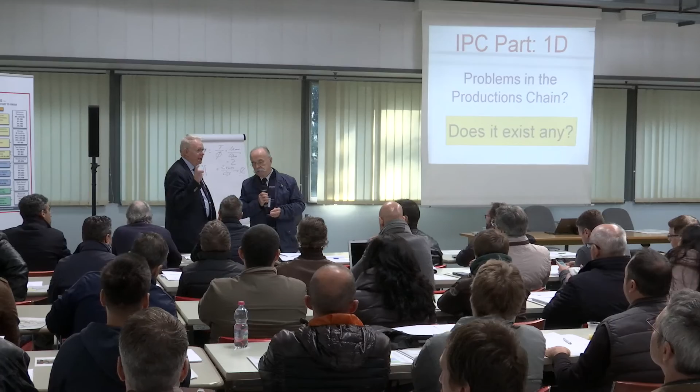That is, he is buying components from different component manufacturers. And in the data sheet, they recommend a footprint. And then comes the question: shall he follow the footprint in the data sheet, or shall he follow the footprint in the IPC standard, as an example?

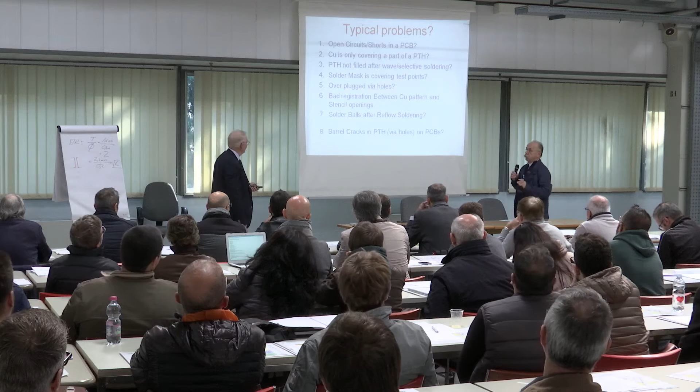Barrel cracks. I mean, this is a crack in the holes.

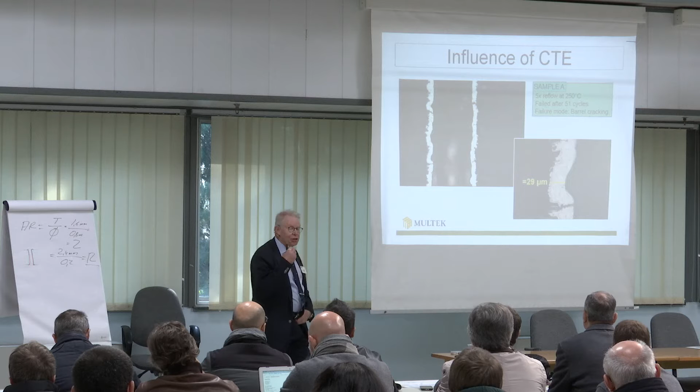Remember Volkswagen, Ferrari. And you know, here you can see it's a perfect one in the microsection. And here you can see it's because they have chosen the wrong base material.

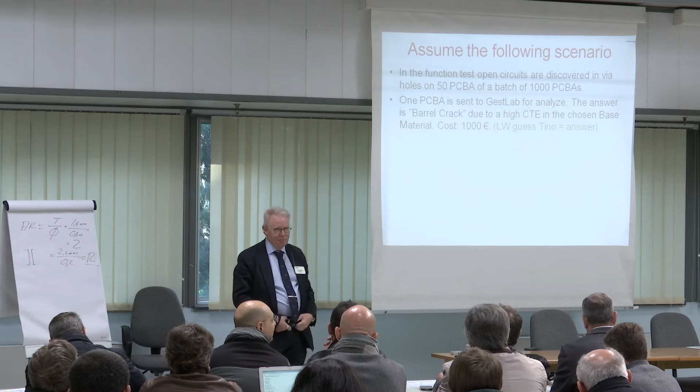So now we can make a calculation. We say that every board, including everything, costs 100 euros. So with 50, the scrap boards are 5,000 euros.

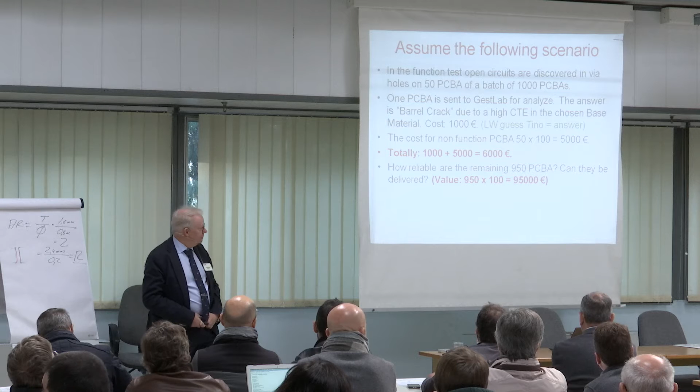Value here is 95,000 euros.

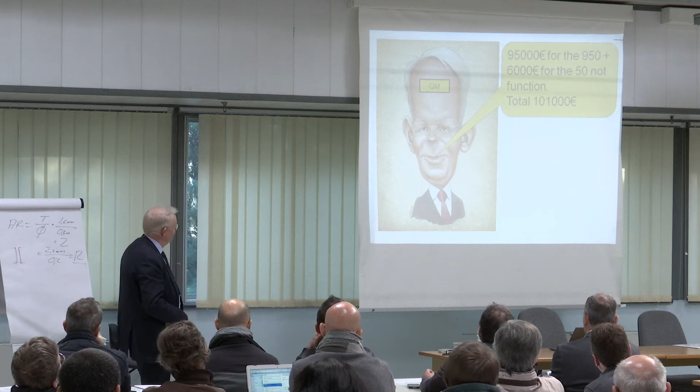And you know the boss, he says, what the... I can't say it in Italy, if it was in Sweden I would.

And now comes the question, what will you do? How many of you will say, yes, deliver the 950? How many?

Dennis, why? Yeah, but the base material is wrong for everyone. No, we have discovered the fault in 50. Maybe the other ones are not complete. Maybe. This is a risk. What happens when the boards come in the...

Oh my God, I have a connection with the mafia.

I accept you. Dennis, who agreed with Dennis? Deliver, raise your hand. A few. Who will say scrap them? Pavarotti, scrap them? Yeah, he's rich. The rest, what do you say? You don't know. Segregate, we will see. Yes, deliver. The purchasing, they don't care about the quality.

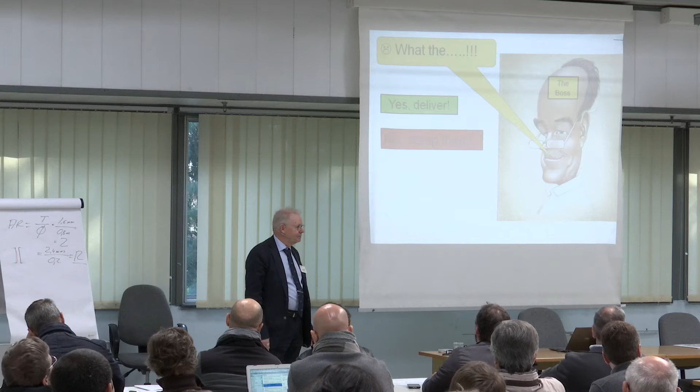Accountability, mainly that. Okay. And this means the boss can't buy a new car, because the Testarossa costs 1 million or 100,000 euros. I don't know if it costs that. Anyhow, it's lots of money.

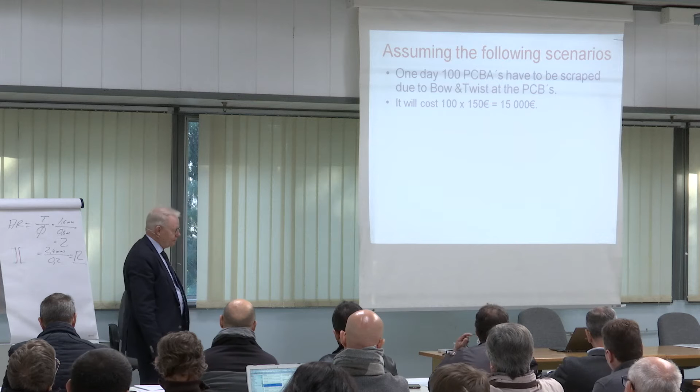It will cost you 15,000. This board is more expensive. It costs you 15,000 euros. Plus some investigation cost, so let's say 400 euros. Totally 15,400.

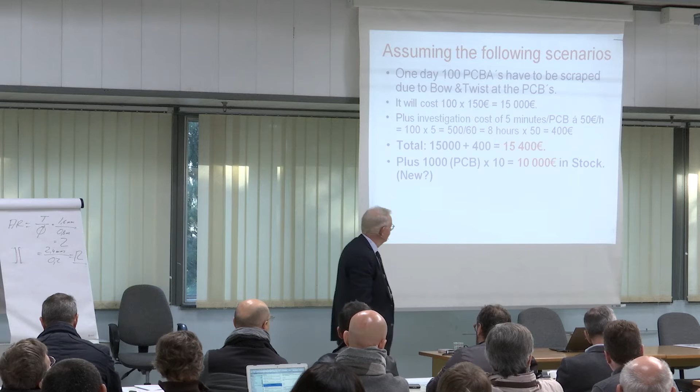So the value here is only 25,000.

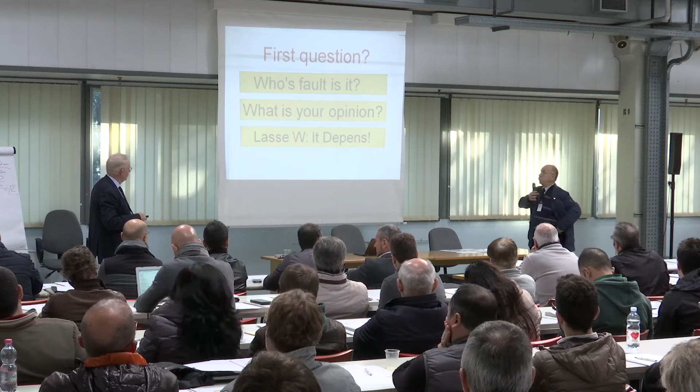So now we have a couple of alternatives here. Has the order, I mean the board project, passed DRC, design rule check?

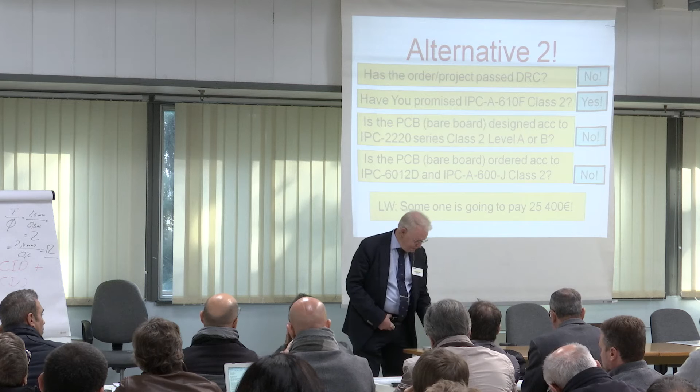99%, okay. But if you have no on this, no on the 3, you are going to pay 25,000 euros. Quindi però prima di dire di chi è la colpa, se io non ho rispettato quelle regole potrei avere la coscienza a posto.

So the conclusion is that to have good bare boards is not only a technical thing, it's a commercial thing plus a design, but it's a lot of commercial, because if you don't refer to the 6012 and 600, the bare board manufacturer is going to say we didn't see any specification.

Chiaro? Qui il capitolato di fornitura fa la differenza. Se nel capitolato di fornitura vi ho chiesto questo, quello, ok, allora posso far valere il mio risultato, ma se dico dammi i circuiti standard, dammi il vetronite, no, a questo punto, guarda, chiaro?

So he's going to pay this, yes. I'm sure there are different opinions here in the audience, and it always will be opinions. But my thing is, to have a good board, it starts with the design.

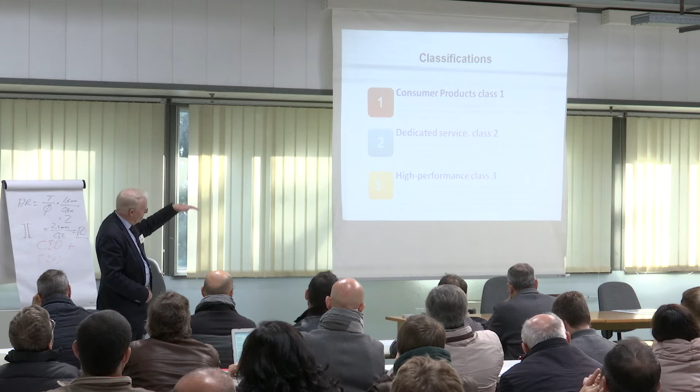In some standards, in two standards, one series and one standard, we have also level A, B and C, that is the design standard plus the footprint standard.

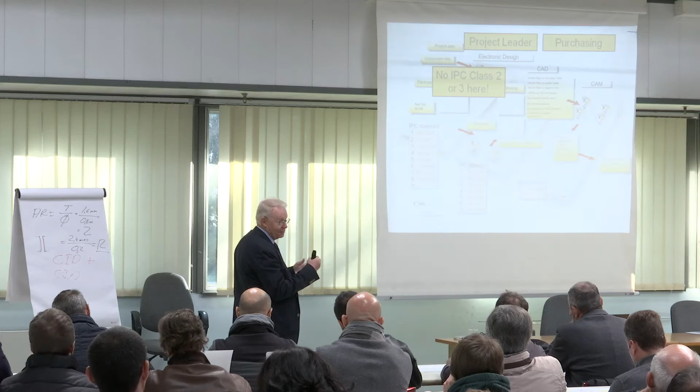And only this. You know, to be able to produce a Class 2 or a Class 3 board, the design, I mean the CAD, must be Class 2 or 3.

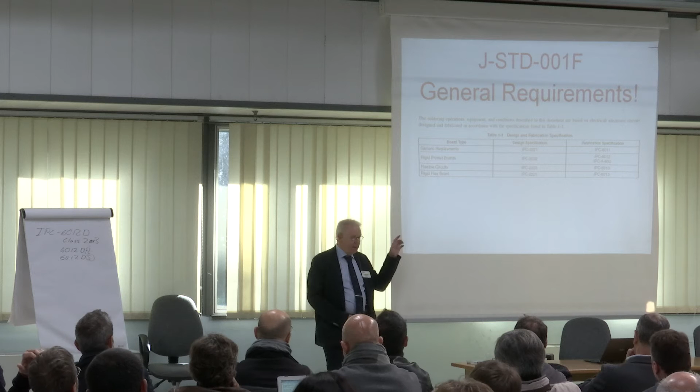And it's really... at first you have the general requirements. It goes from the start, the design - it differs depending which board you have - but then you come to the fabrication. This is PCB fabrication, so here you see the reference back in the chain.

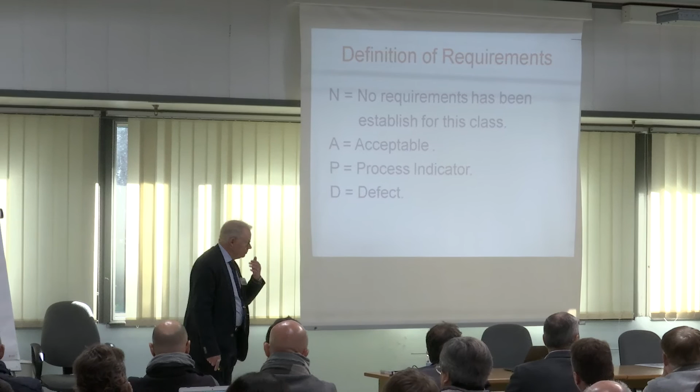And here I just take a few examples: materials and processes used - you know the material we use, there's the bare board, the paste and all this stuff. To assemble or manufacture this board, the components shall be selected such that their use in combination produce products acceptable to this standard. If you don't do that, it's a defect across all standard classes.

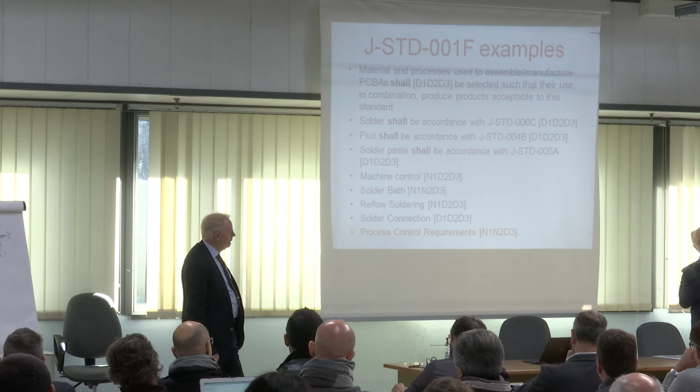You see, manufacturers of class 3 products are required to have a documented process control system. You need to have the system in class 2, but you don't have to write it down.

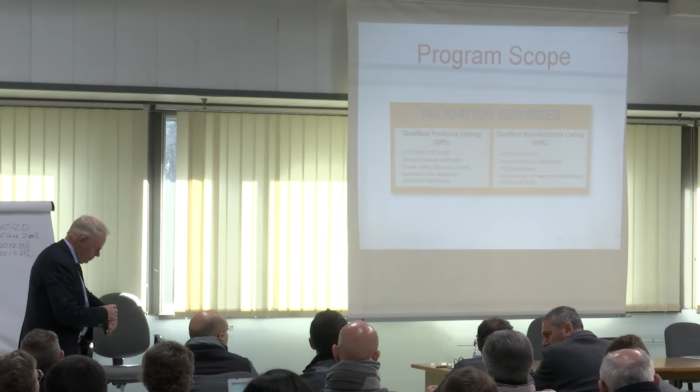So now we're coming to the next step, design.

Now you take the first one here.

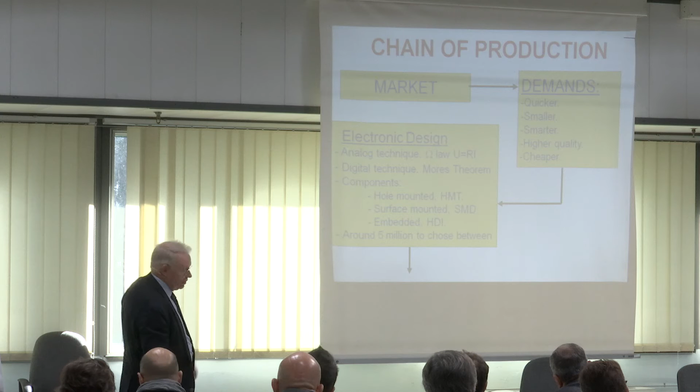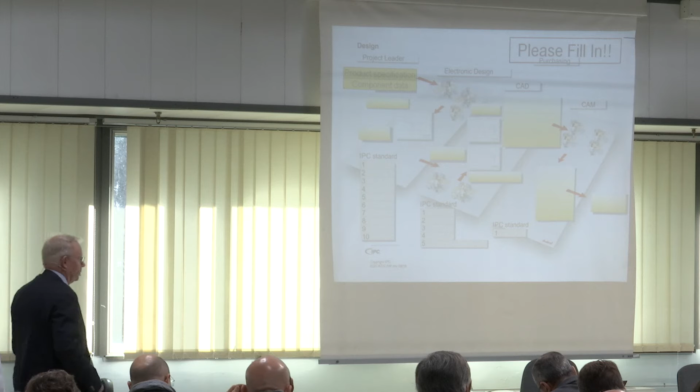And here comes the electronic design departments. They create, you know, the electronic schematics.

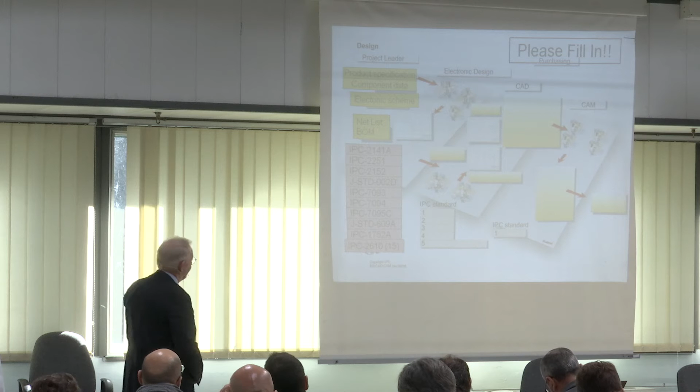And it's an interesting thing here that the first two are for when you have high speed and high frequency components, and also impedance control and such things.

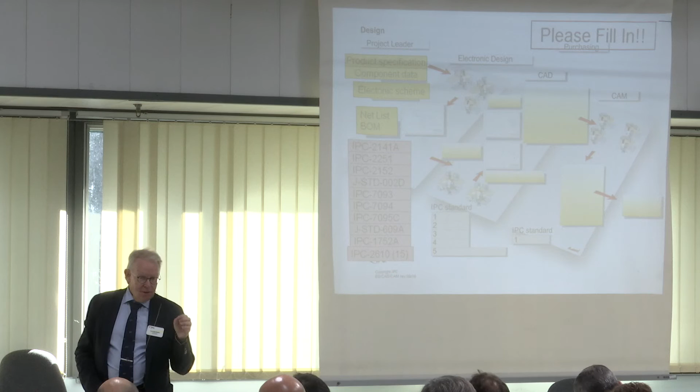And why is this important? Because if you want to have a good solder joint, you must understand that the surface finish you have on your component must match the surface finish you have on the board.

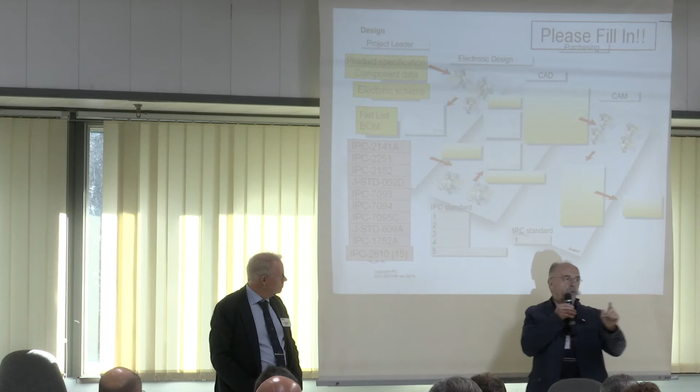This is for the material declaration, so you know that you're not violating any laws in different areas of the world, RoHS and other laws.

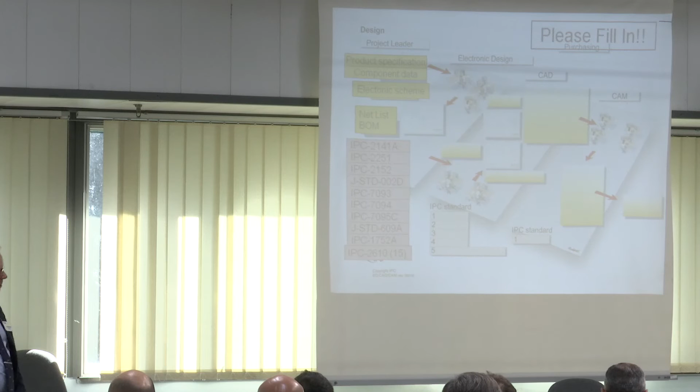So here is the base, and here you see the standard, just an example, how it looks like. Material declaration, which is a software which you can apply. You have different levels, A, B, C, and D, classification.

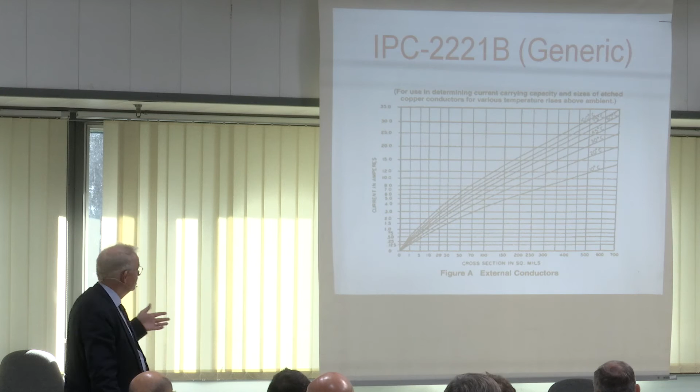For ENIG. And then you have the design guides for high-speed controlled impedance, high-speed electronics, the number of amps.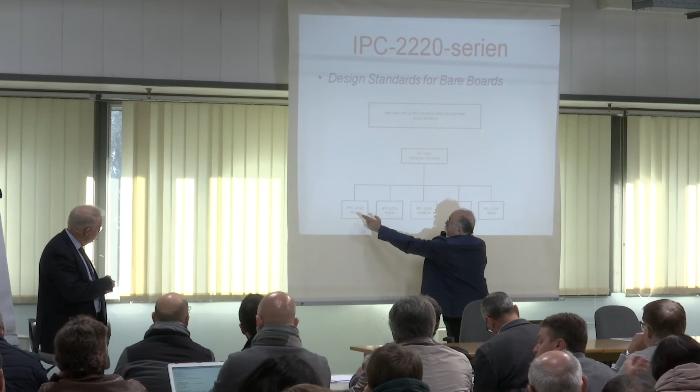Integration. Microvia. So here we have also the classes 1, 2, 3.

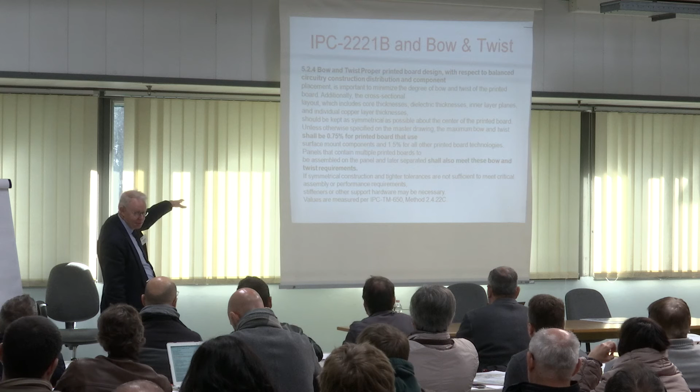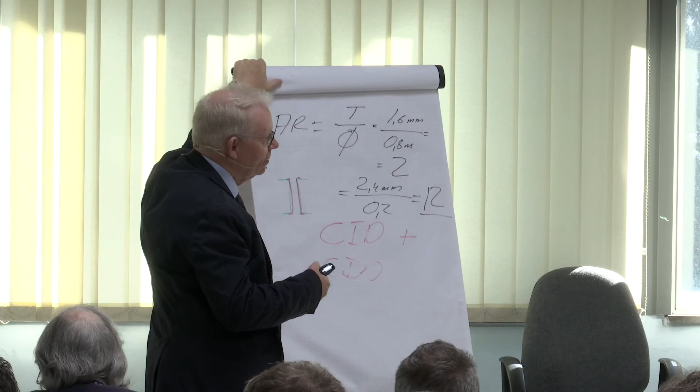So if you go back to my calculation here, if you have a 1.6 board, then the smallest hole can be 0.35 like that to get the 5 here.

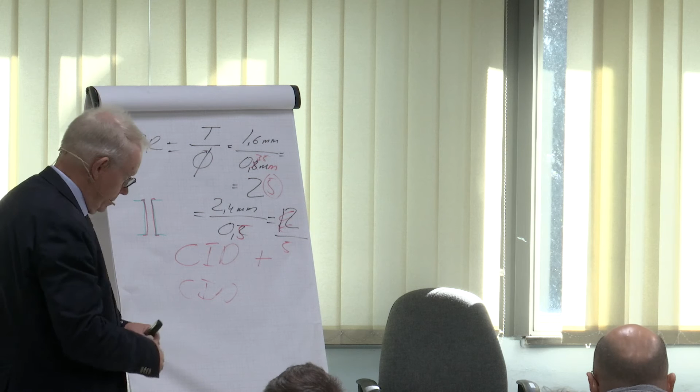And the reason for this is one, this is what it looks like in the CAD system on the screen. It's always in center, the hole.

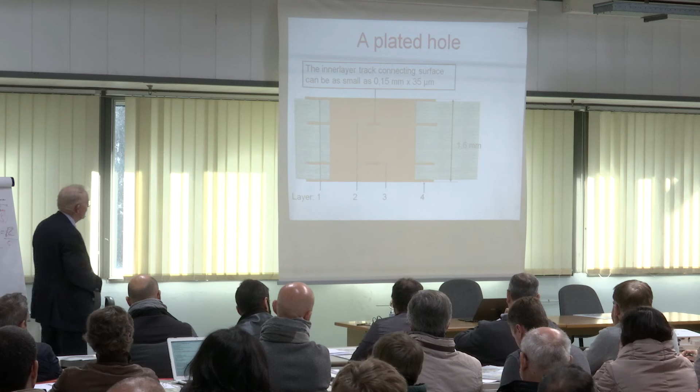Here is a picture of a microsection of a hole.

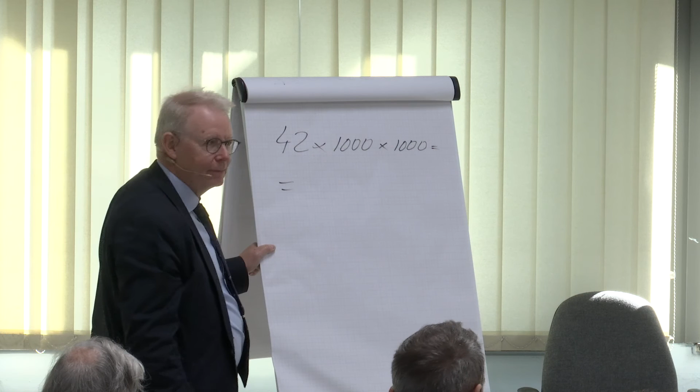What is this? Who is good in mathematics? 1000 boards times 1000 holes, 42 times 10 to the 6 possible problems.

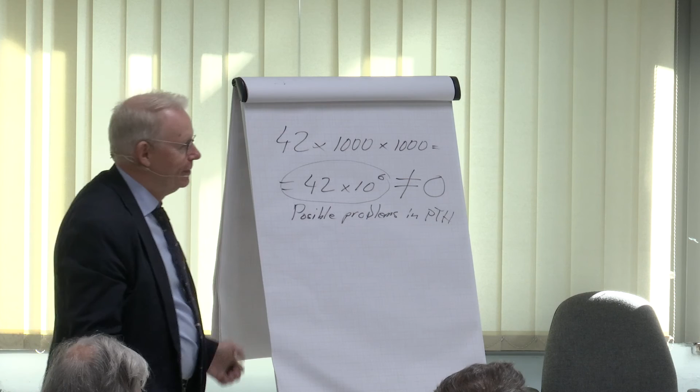If I were responsible to buy boards, I would have nightmares every night.

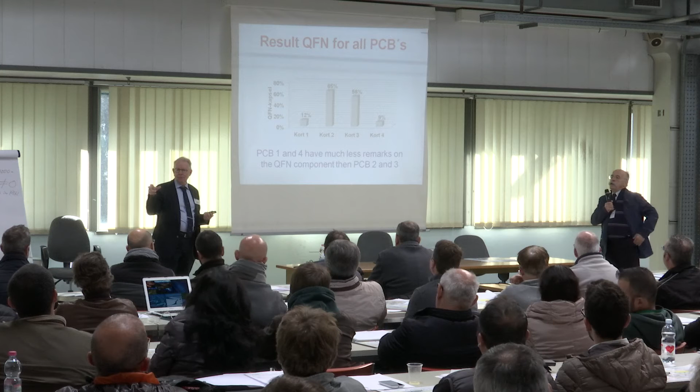Since this was in one panel and was soldered at the same time, you can see the difference in the quality.

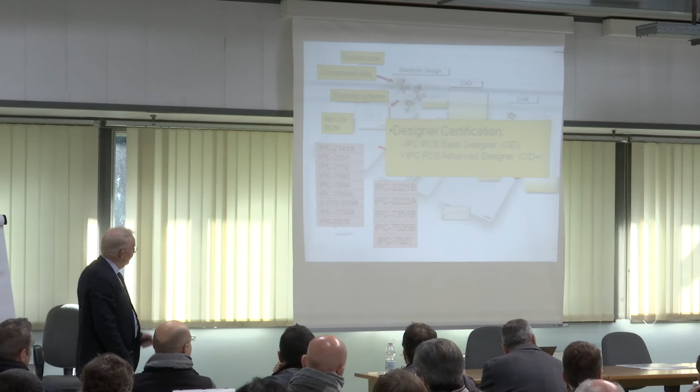And then we have, for this area, the IPC Basic Designer, this CID, and then we have the Advanced CID Plus. And we have this in Italian.

One of the teachers is here, this is Pietro. Pietro.

So here you see, we have it, this should be here in Italy too, but it's wrong. But we have it in Italian.

When normally you return this, you get the return from the CAD people. All his files, Gerber files and all this stuff.

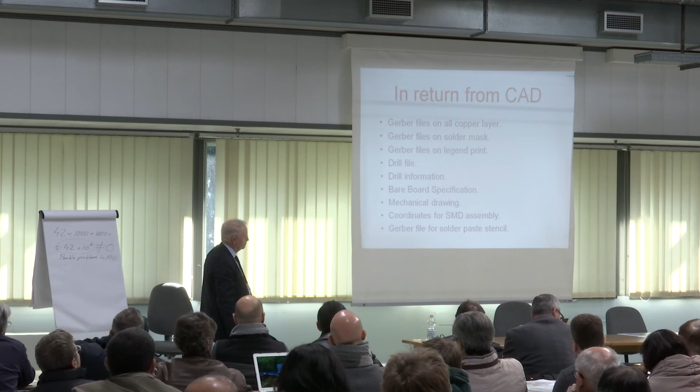So now you can fill in here that this is the Gerber files, drill files, bareboard specification.

And this information then goes to the CAM, this doesn't just exist in the bareboard companies, but also the assembling people, EMS people, they also have a CAM department. And here they create the program for the laser plotter, for drilling, routing, AOI, electrical tests, and so on.

And then it goes to the bareboard production.

And remember, if you want class 3, you have to use class 3 here. If you want class 2, you have to design it according to class 2.

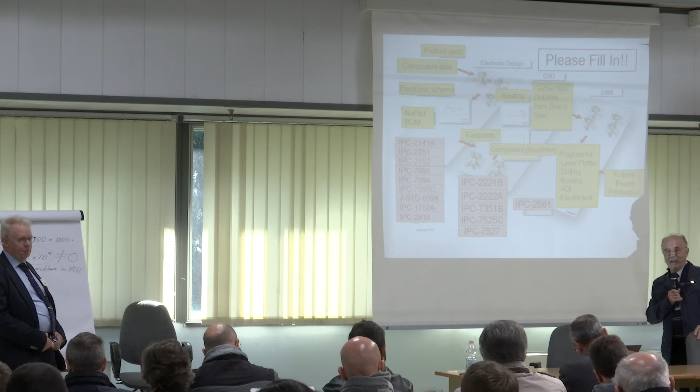You have to write a lot because then you've got some heat in your muscles. Yeah.

Okay, ready? So you see if this was in the basement. And you know, I don't know how you build houses in Italy, but in Sweden we start with the basement. So if you don't start with the basement, you will end up like this.

And we need the checklist. So now we're going to have the next chapter.

Manufacturing, now you go to the next chart.

And we will start here in the blue. You can see here.

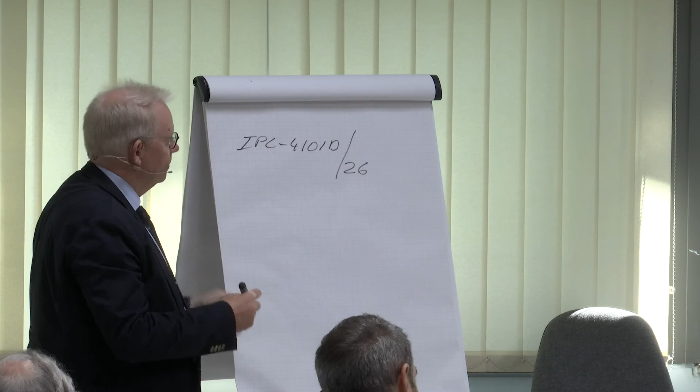Quando si va a ordinare il circuito stampato dal nostro costruttore e fornitore, noi dobbiamo dire voglio questo materiale che sta in quella norma, la riga 26, abbiamo detto sono circa 139, quindi devi individuare tutte le caratteristiche relative a questo tipo, dalle caratteristiche dielettriche fino alla costruzione. You have fine for FR4, for high TG, for bromine-free, meaning no bromide flame retardant, and also the inner layer has to be the same. It's lots of material here which you can make a choice of.

Chiaramente se vado a fare un sandwich di questi materiali devono essere della stessa famiglia, no? Se no fa disastro. No, non riesce disastro, però insomma, qualche dubbio, specialmente sulle caratteristiche... e arriviamo più avanti oggi, quando andiamo in laboratorio, adesso avete metodi per testare quale materiale è stato usato.

And this is also what we talk about CAF. Questo è il metodo di test per misurare, fare prove su campioni per vedere se il materiale è CAF o non CAF resistente. CAF, abbiamo detto prima, crea dei filamenti, è un fenomeno che succede all'interno dei circuiti stampati.

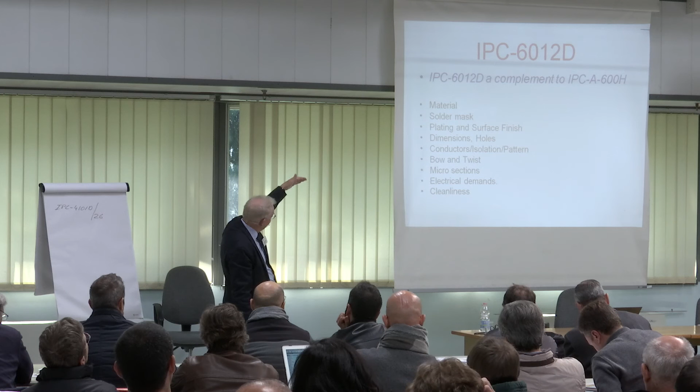And here you see we have the same things which we discussed before, specified what to have in this time. Clearly it's a complement to that 600 standard - we're at revision J, as you saw before, there's still an H, but we have the J now.

Perfect. Great, just in time, yes. For free. You know, IPC changed their revisions often. I have to change these every week. Yes.

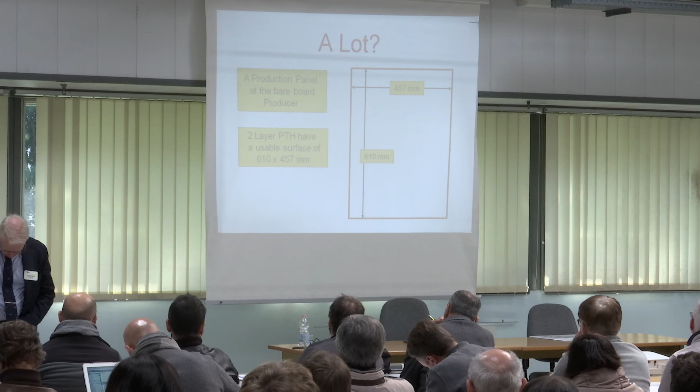Clear, look at the numbers. And you know, when you have a two-layer board, the maximum, normal standard maximum panel which the bare board has is 610 by 457 millimeters - the panel outline dimension, normally from which the individual boards are then derived. That is a production panel.

If you have a four-layer board or a multi-layer board, they need a frame here for production reasons, so the maximum is 560 by 410. This costs nothing, but make sure it's done - on the board, on the frame, put test points, the ones indicated by the standard. They're important, you can use them for testing - if you don't use them, they're there anyway, they cost nothing.

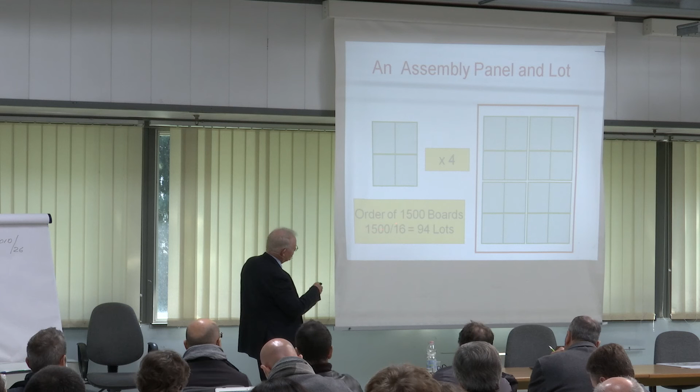Price stays constant. So if you have one board here, that's your board. You have your panel here for the assembling and soldering. The bare board manufacturer can put 16 boards in one panel - so in a panel you could fit multiples proportional to the board size, obviously, that's clear. So if you have 1500 boards divided by 16, you get 94 lots - so if we get 1500 boards for 16, for each we have about 94, 96 lots.

So now you go back to your table here and you see your range here - we're in that field, from 91 to 150, the lot is that one there.

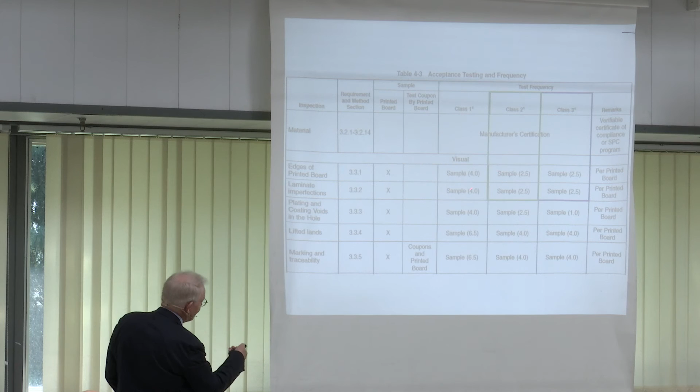So now we come to this book, the 6012, which has pages with parameters and how the bare board manufacturer shall test these parameters before they ship it to you. This is nice - this standard tells the manufacturer, in order to guarantee this to you, when they must do the sampling, at which station, and how many samples they must take - really the samples become so many you'd need to cut them up.

So you have here class 2, sample 2.5, and the same as number 3, like the edges, laminate imperfections and so on. So then we go to this one: of this 94, they should test 11 panels and make a protocol of the result.

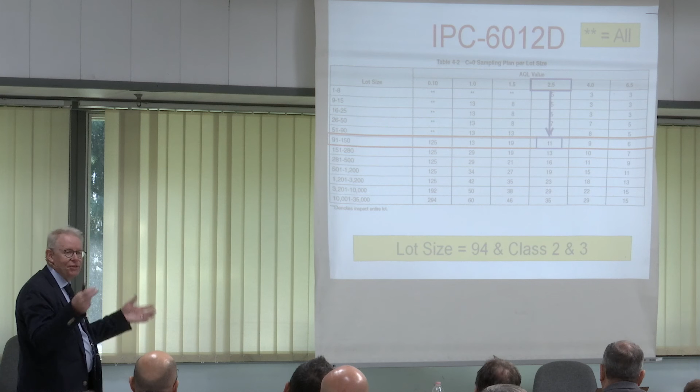Okay, go. And if you go to the next one, plating and coating voids in the holes, that means the quality of the plating. In class 2 it is 2.5, in class 3 it is 1.0. And then you see there in 1.0 you have test 13, and this you can't look at, you have also to take a microsection.

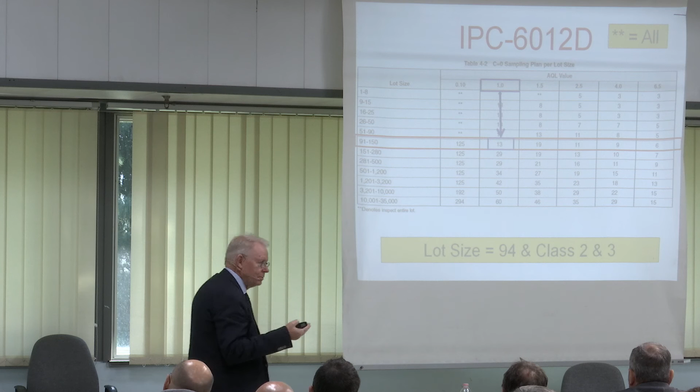And we can go on, bow and twist, and then it's 4.0.

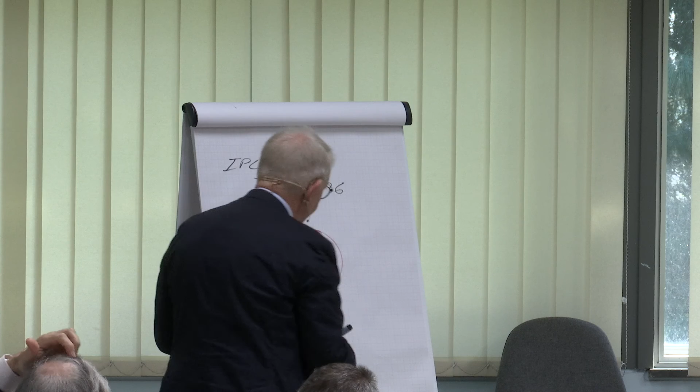Here's the pad. And you know, the CAD people want these to be smaller and smaller, to save space. So if you have to check, the drill can't be like that. The drill must be at a certain distance here.

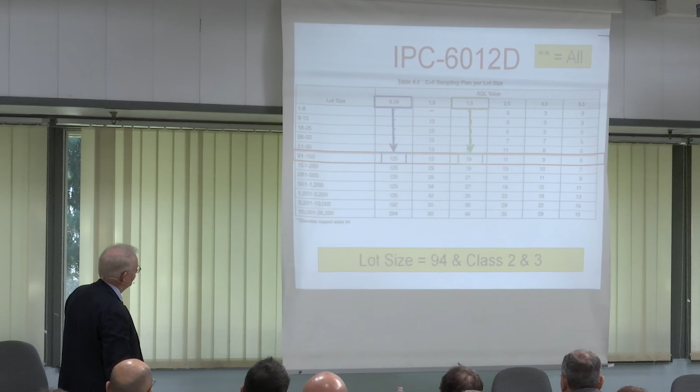That means 2 test coupons for every panel. That means that for class 3 they have to make 94 times 2, 188 microsections. But for class 2, they have to make 38.

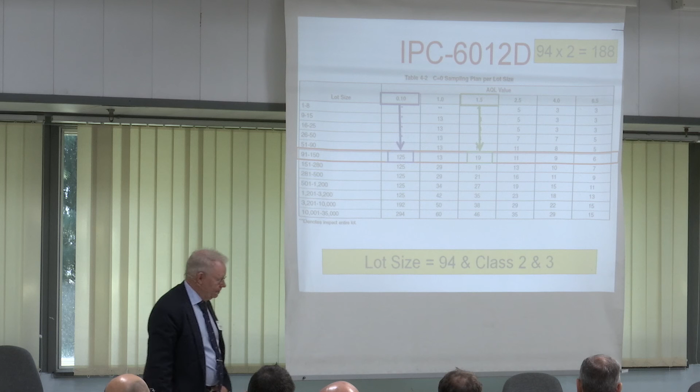Here you can see the difference in microsections.

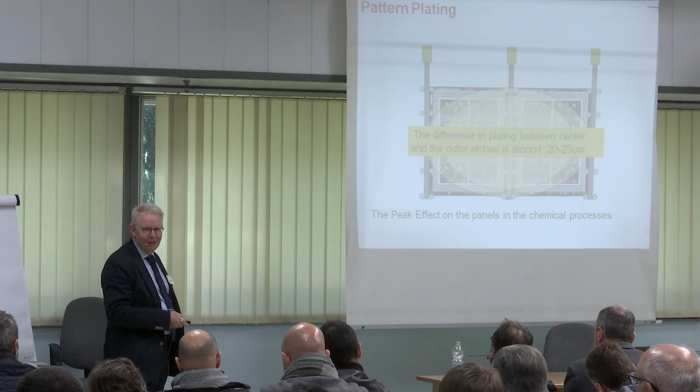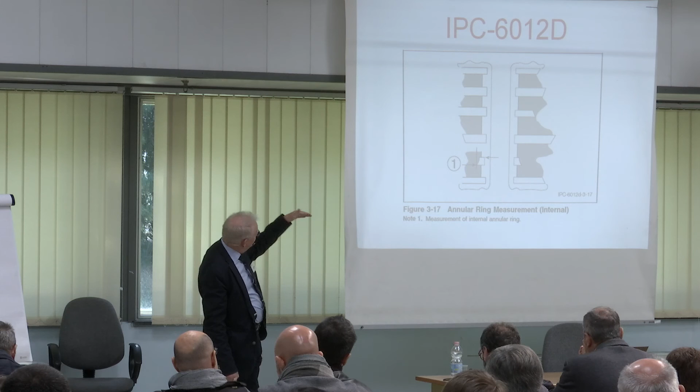And IPC has now, in this book, how they should measure the annular ring. And we have, as I saw before, lots of these demands. Also for wicking, how much copper can go into the hole, in the plating, in the fiber. So you can see we have lots of it, but we have conflict areas.

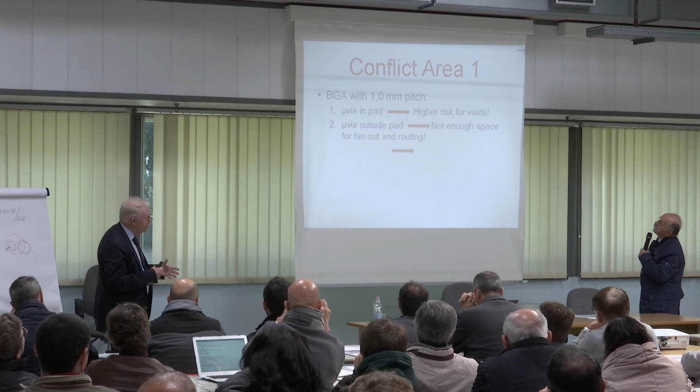And if you have the microvia outside pad, which doesn't give any voids, then you have not enough space for fan out and routing. The CAD people know about that.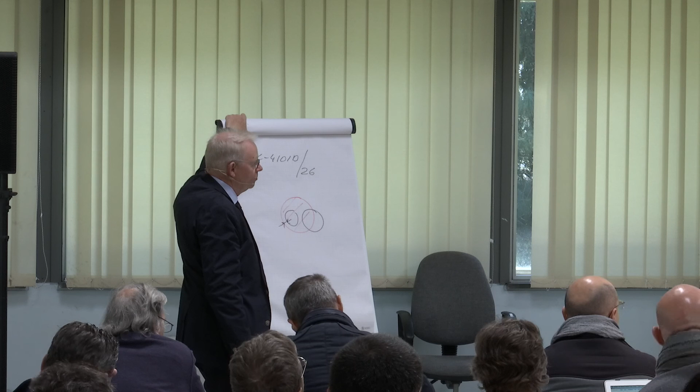So here we have just examples for the 600.

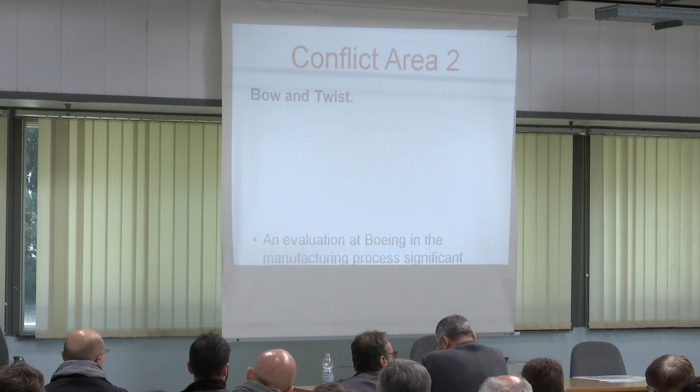And bow and twist. L'imbarcamento, sappiamo tutti com'è. Here at Boeing, they found out if you have too many boards in the panels, it was not so good regarding bow and twist. Se tu hai tante schede in un pannellone, questo problema qua potrebbe essere fastidioso. Here you see just the result when they discovered it at Boeing.

But you have a conflict area, which I told you before. If the PCB supplier detects... Just in time. Ah, yeah, correct. You can translate when I change this.

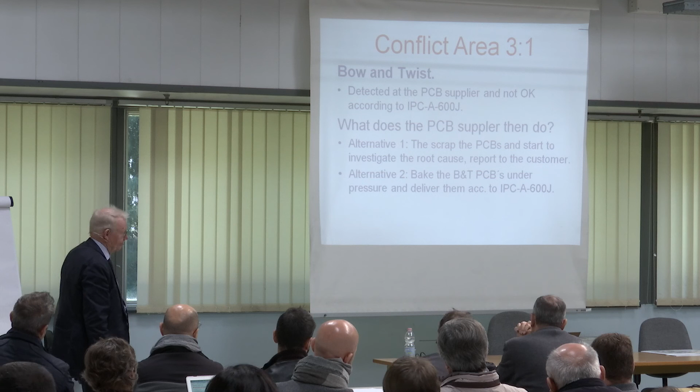Then it comes back. So what's happening in here, that's the banana comes back.

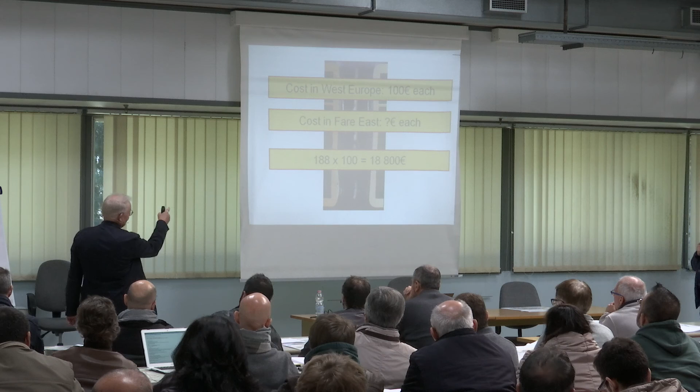And this is also one of the reasons that very few people can deliver class 3, but no one wants to pay that. Except the military people, medical people, the space people, and the aircraft people.